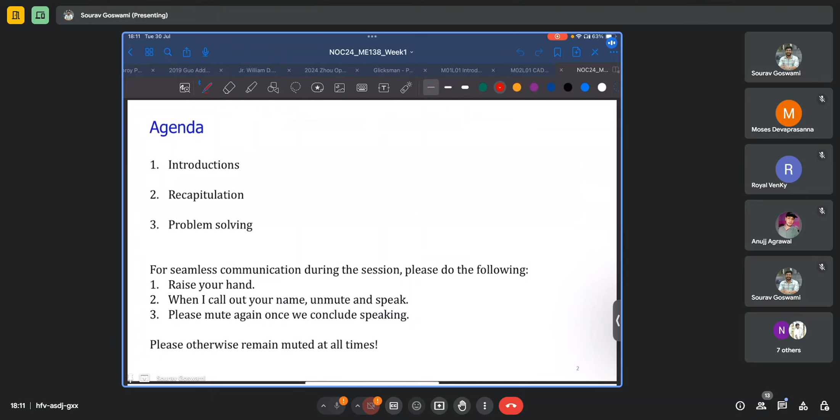Now, during the course of this session, I'll request that you remain muted, and in case you have a doubt, anyway, we'll be taking up doubts at the end. But still, in case you have a doubt midway, I request you to raise your hand, and then I'll ask you to unmute, and then we can discuss whatever your point is. And otherwise, please remain muted, as any undesired noises may disturb other participants.

So I just picked a few market trends from public sources on additive manufacturing. And for students or others like teachers associated with this field, additive manufacturing has become quite the buzzword. And there are courses, people and students are researching into it, papers are being published left, right, and center. But why the sudden push? Why the upsurge? And what is this buzz about additive manufacturing? And is it only restricted to our educational institutions and labs?

So here is a plot of the market size in billions of US dollars against a timeline. So currently we are somewhere here.

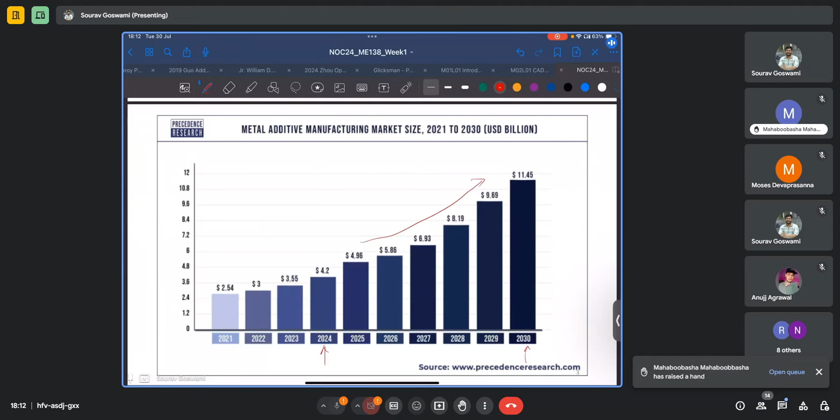2024, it's projected that the total market cap of additive manufacturing is somewhere around $4.2 billion, but it's a rising graph. And around 2030, it is expected to reach a market cap of 11.45 billion US dollars. So quite the opportunity for us.

And if we focus on Asia, we see that, I mean, of course, in the world, the US alone has captured or cornered 36% of the market. The next biggest leader is Asia with 28%. And among the Asian countries, China with close to 50% and Japan with close to 30% are the market leaders when it comes to, say, the money that they're pouring into R&D and technological development as far as additive manufacturing is concerned.

Mahaboobasha, do you have a question? Could you please unmute? Mahaboobasha, do you have a question? Okay, maybe not. In case you have a question, please raise your hand again.

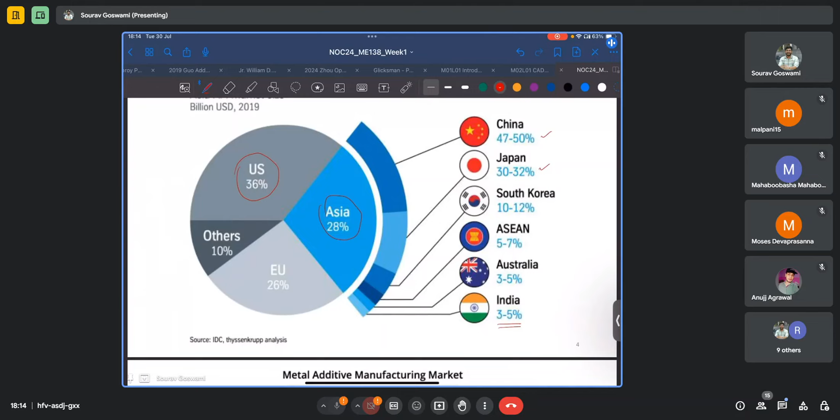It is the first word to come out of your mouth. Even if you ask me, so what is the application of your research? I'll blindly say aerospace. But how effective is that? Because for parts that go into rockets or that go into jet engines, there is a rigorous qualification cycle. And as we might already be aware, or for some others, as we'll come to know gradually, the parts that come out as built from the additive manufacturing process often do not have the most desirable properties. They might even have defects. They might not be as dense as they were designed to be. And thus, large-scale application of additively manufactured parts in the aerospace industry is a process in the making, but we are not fully there yet.

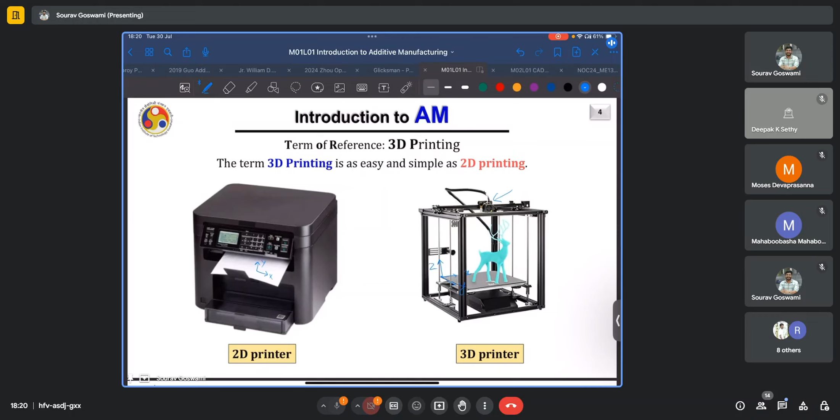Now this Z axis may be attached either to the build plate, in which case the deposition head moves in the X and Y directions, and the build plate changes its height with every layer, or the Z-axis may again be given to the deposition head itself, whereas the XY axis lies with the stage. So in each plane, the XY axis will move, whereas for each deposition, the head will keep rising by a fixed distance.

Now here is the formal definition of the additive manufacturing process. So AM refers to the layer by layer fabrication of three-dimensional physical models directly from a computer-aided design. It is an automatic process of manufacturing objects such as parts, prototypes, tools, even whole assemblies directly from their CAD models without the use of any cutters, tools, or fixtures which might be specific to the object geometry. Now, the definition is important because it helps us distinguish between processes and characterize whether they fall into the additive fold or not.

So typically in a conventional manufacturing paradigm, you would need fixtures and tools that are specific to the type of job that you're trying to manufacture. Say if you are working with a cylindrical job on a lathe, a three-jaw chuck is suitable. Whereas if your job suddenly becomes cubical or cuboidal, you cannot use a three-jaw chuck anymore. It must be a four-jaw chuck. Similarly, depending on the type of operation that you're performing, whether it is milling or cutting or drilling, the type of tool that you're using will change. However, additive manufacturing is free from such restrictions, and it is truly a free form fabrication because the same setup, the same machine, the same deposition head will work irrespective of the geometry of the object, however complex it might be, and irrespective of the final part that you envision in your mind.

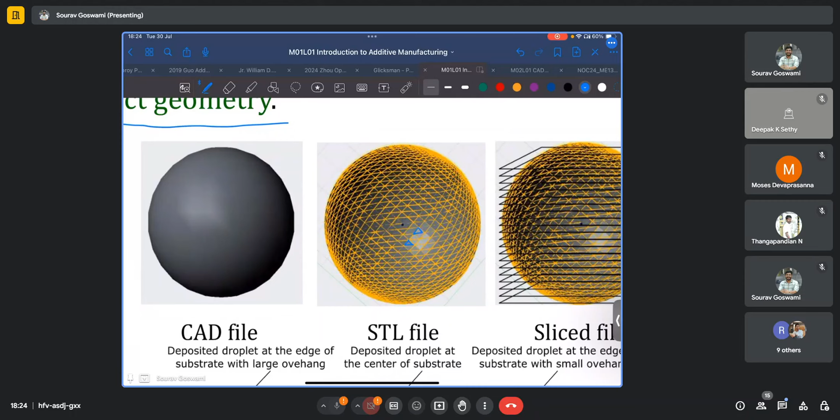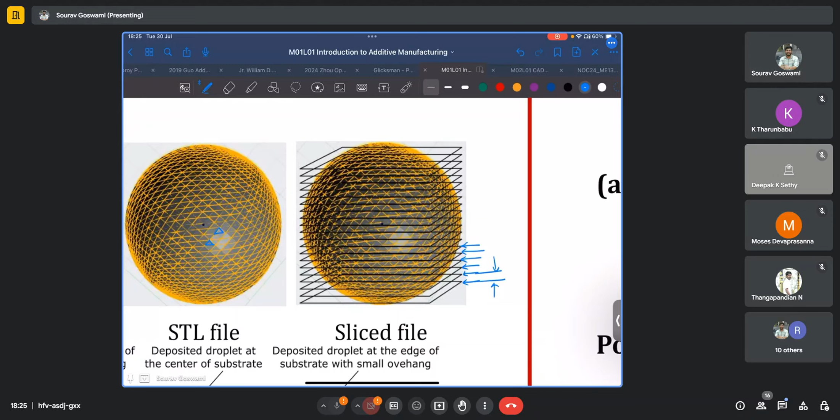Then we slice the tessellated STL file. Slicing because, as we read in the definition and as we have been discussing, the additive process is a layer by layer process and proceeds in a layer by layer fashion. So as you see in the example here, the entire sphere was first tessellated or covered in these triangles, and then this tessellated file is sliced by all of these planes, as you can see. And what will happen is, in each printing pass, the intersection of this tessellated file with the plane will be printed or deposited or sintered, depending on the process that we are undertaking. Then the deposition head will move up or the stage will move down by this fixed height of each layer, and then the next intersection of the slicing plane with the tessellated file will be deposited.

But of course, first, this slicing, tessellation, and generation of supports is being simulated in a computer. You're visualizing if there are any changes to be made, how the tolerances should be tuned to best achieve your end goal. And once we are satisfied with this pre-processing, once our work on the computer is done, we move on to the actual building of the part in our machine, which is in an additive fashion, or a layer by layer fashion, which is accomplished through the stacking of successive layers.

And then in most cases, you would require a post-processing step where, if you have generated supports, you might need to break them away or in certain cases dissolve them in certain chemicals. You might need to finish the surface of your finished part because the surface tolerance and the surface finish might not be at your desired level. Or in certain cases, if the density that your as-printed part has does not qualify for the client's requirements, you might even have to undergo a step such as hot isostatic pressing to improve the density.

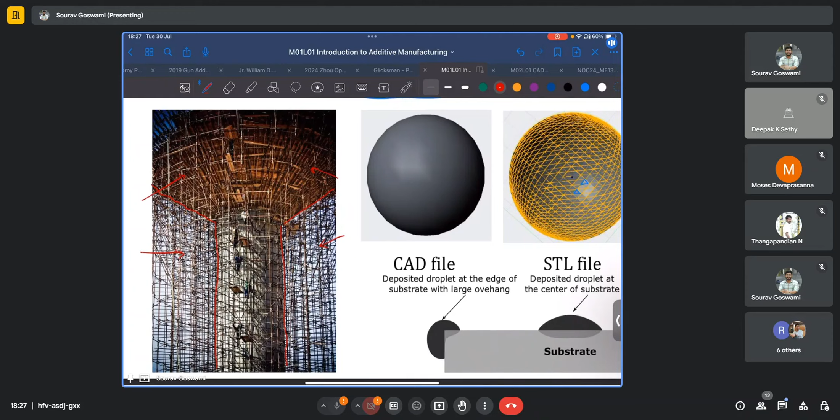Now, we see these structures all around us all the time. But at the time of their construction, they must be supported by, for example, the bamboo scaffolding that we see here. Once the concrete has solidified and hardened sufficiently, the support structures may be removed. And similar is the case for additive manufacturing. That is, for geometries which might have significant overhangs, we might need to support them with additional support structures which are not really part of the original intended design, and thus they will have to be removed.

And since we have to remove them later, of course, an intelligent guess would be to make them, say, not as strong as the core part, or to make them thinner, or less dense, or even hollow, so that the removal is easier. However, they must still be strong enough to support the product.

Here again, the instances of deposition of material on a flat substrate are illustrated. So when a material is being deposited, say in the bulk or in the middle of the substrate, there are no problems because it is supported on all sides. However, when we are depositing near a corner, the dynamics will be such that there is the weight of the droplet or the material acting, then there is the surface tension acting on the surface of the molten material. Also, there is a normal reaction. There will be frictional forces and so on. And the interplay of all of these forces, or their balance, will decide whether this material is able to rest on the substrate or it falls off.

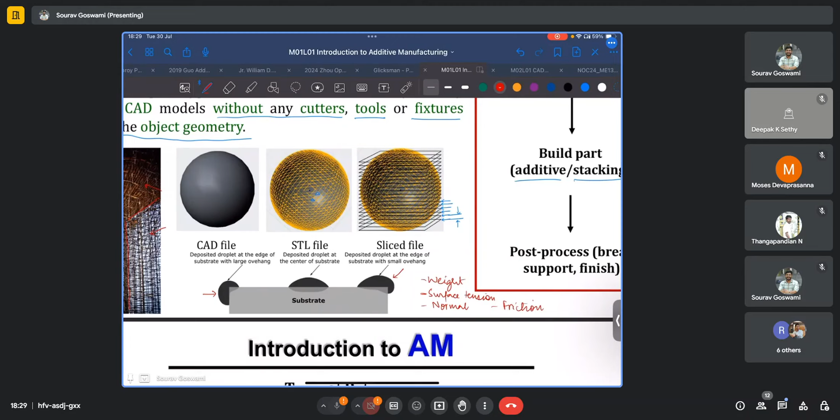In the example here, we see that if the overhang is large, or in simple terms, if a larger portion of the droplet is without a support, there's a very good chance that it might simply fall off. And one can also imagine that even if, say, for the first layer, the material was able to be sustainably put on the substrate, with consecutive layers of build-up over this overhanging part, there might come a critical point where the pre-deposited layer is unable to support the load anymore and the structure collapses.

We'll be touching all of these aspects in great detail as we move through this course.

Some greater insight into the term digital manufacturing. Now, digital manufacturing is actually used to refer to the set of technologies which can reduce the product development time and cost, as well as are capable of addressing the need for customization, increased product quality, and faster response to the market. Let us discuss each of these terms one by one.

So, how does additive manufacturing help to reduce the product development time? We will come across a flowchart of product development where we will see that the typical or conventional cycle actually involves multiple iterations of designing, refining the design, making a prototype. There are lead times involved everywhere. Then corrections are to be made, toolings are to be designed, the assembly line, the production line has to be customized to each product. And after a few iterations, we end up with a final version of the product, which can then go into mass production. However, with AM, most of these complexities are alleviated.

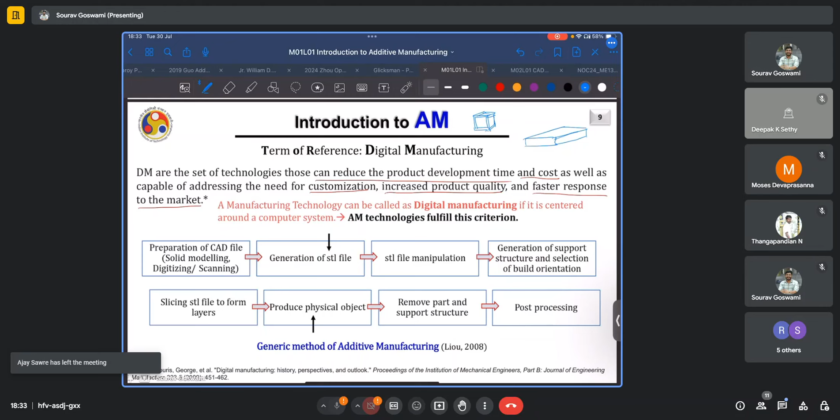Customization, as we discussed, we can make the design to suit a specific patient in the case of implants. You don't need to adapt your production line as per the needs of each patient. Increased product quality, well, debatable, given that most times the product coming out of an AM cycle still need further post-processing and need to be qualified rigorously. Faster response to the market because of the immense flexibility and adaptability, as we'll see.

And a manufacturing technology can be called digital if it is centered around a computer system. And as we saw, our very production starts in front of a computer, and we'll spend a good amount of time optimizing the production in the computer. Thus, AM technology fulfills this criterion. And just like a digital image is made out of two-dimensional elements called pixels, the same analogy somewhat is extended to the case of STLs or standard tessellation language files or stereolithography files, as we'll see.

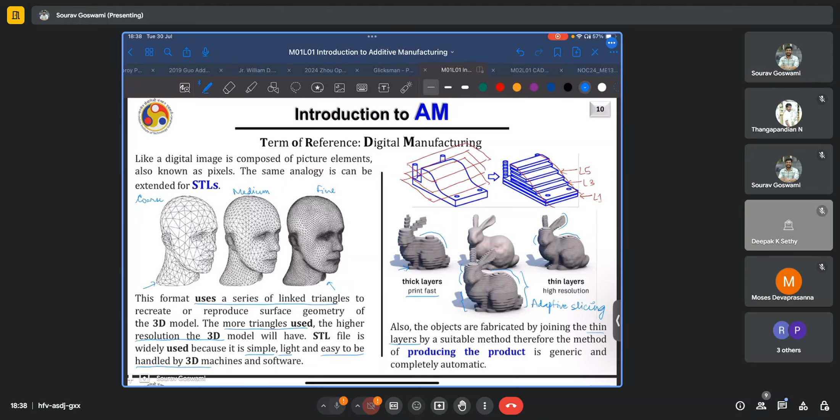The objects that are fabricated by joining these thin layers by a suitable method of our choice is a generic process, and it is completely automatic. It is not dependent on the geometric complexity of the material, the difficulty in machining the material, or for the need to design special fixtures and special tools.

Now here we have an example that illustrates rapid prototyping versus virtual prototyping. And based on this, I would say excellent classification on whether a prototype is physical or virtual, or whether it is a component level part, or it is a complete assembly, and how accurate or rough the representation is, we can end up with different stages of development.

So if it is a physical part, but only of a component level, and it is rough, we can end up with a foam model of a car. If it is physical, it is very accurate and complete, it is the final product itself, as one would say. If it is just a virtual representation and a rough representation, that too, a sketch suffices. And if it is complete but virtual, it's the CAD model of a car.

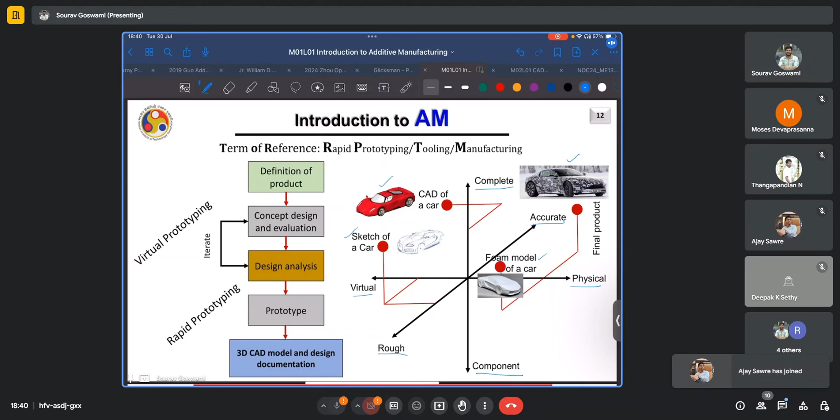Here we have a flow diagram illustrating the relationship between virtual prototyping and rapid prototyping, and Professor Kapil explained it pretty well. Let us also familiarize ourselves with the capabilities of the AM process, and in the duration of this course, also the limitations of the process. So AM refers to layer by layer fabrication of three-dimensional physical models as we study, and the primary capabilities that we'll be looking into are the geometric capabilities and the material capabilities.

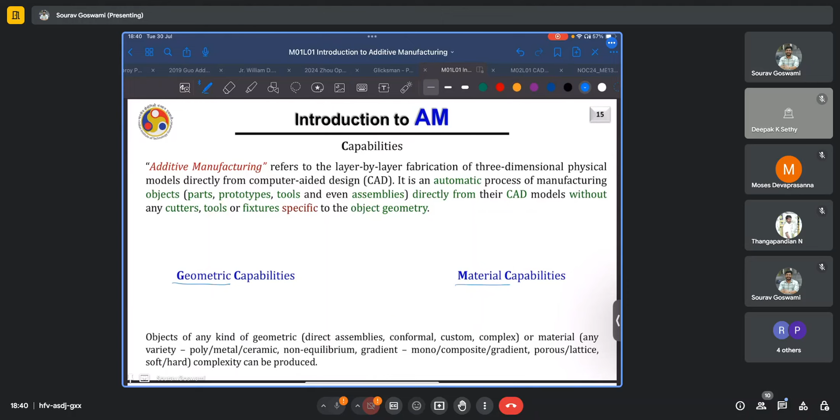Why is this similar to the conventional design and not exactly the same? It is because of something called design for additive manufacturing, whereby we adapt our design to have the same functionality, because that is paramount. We can't really change the functionality. So say it should have the same strength, it should have the same number of degrees of freedom, and so on. But we slightly tweak the design to exploit the benefits of additive manufacturing and to overcome any limitations.

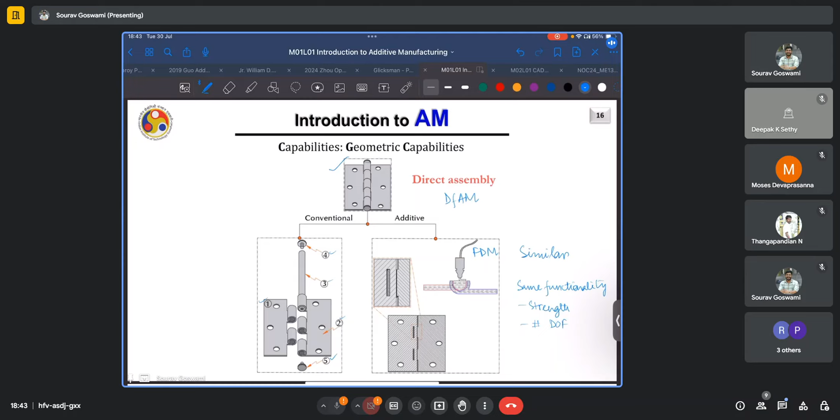Say if you have large overhangs, you would like to minimize them. Thus, the same part can be produced additively and via conventional routes, and each will have its own features. In the duration of this course, as we cover each process step by step, we'll find out what the specific limitations are in each case.

Again, in terms of geometric capabilities, another example which illustrates the high value of the additive process is the manufacturing of these conformal cooling channels when you are, say, casting a part. So typically, you will have these parallel cooling channels along the ends of the mold, and you will have water or any other coolant of choice circulating.

Say it goes in one way, comes out the other, but it's not really suited to the type of part that you're trying to manufacture. Whereas in an AM process, you can actually have these conformal cooling channels printed around your part itself, to suit the specific geometry or the customization that you're looking to manufacture.

For example, in this case here, we are trying to print this mold, and what we can do is we slice this geometry. So if I slice something like this along this plane, maybe I'll not deposit material in the center, wherever my cooling channel is supposed to be. And for the rest of the part, I will have material deposited. The dimensions of this region with no deposition will vary with the change in cross-section of the part.

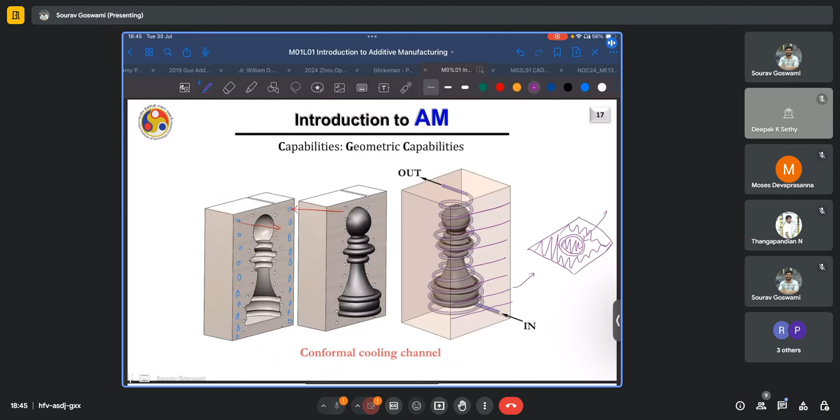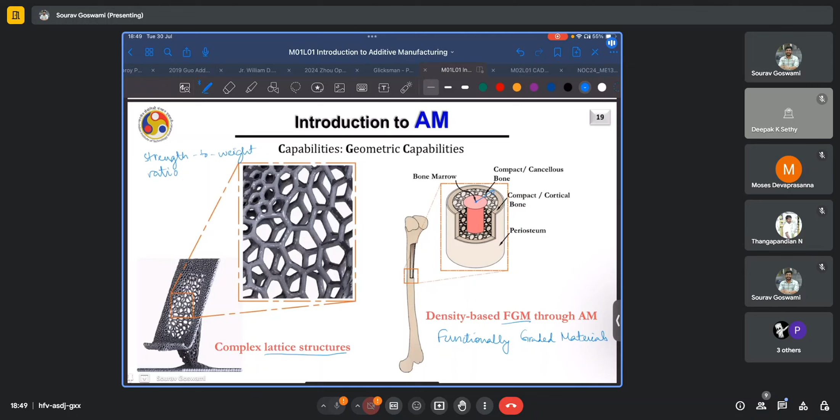Some of the materials that can be processed by additive manufacturing are listed here. I'll not go through the entire list, but as you can see, a wide gamut of materials is covered: polymers, ceramics, food materials, pure metals, alloys, high entropy alloys, and so on. Functionally graded materials, as we discussed.

Now, coatings have been previously used to suit such an application, but say you have this metal part and you coat it with a ceramic layer, but then this coating is a tricky process. It is costly. Not all coatings are compatible with all surfaces. Your surface might even require some, say, pre-processing. The coating being very thin is vulnerable to damage. It can be scratched off, and then it can come off as well.

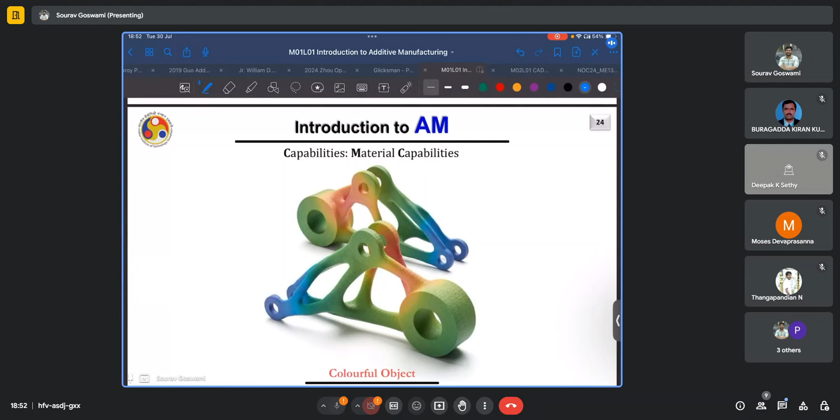Another example of changing material being this colorful object, where depending on the location, the authors have used different colors to build a part. These colors are not just on the surface but through and through because the material or the filament used to build them were different. Some other examples, a transparent object and another colorful object.

And finally, the classification of the additive processes into various categories. So as per ASTM, there are 7 major types of additive manufacturing processes, and all additive processes may be classified into any of these 7 types. The first is vat photopolymerization, where you have this vat of a resin or similar material full of it, and your stage moves down in each step. We use a UV laser, say typically of some 40 to 50 milliwatts. The laser scans on the surface of the resin and cures the area of interest.

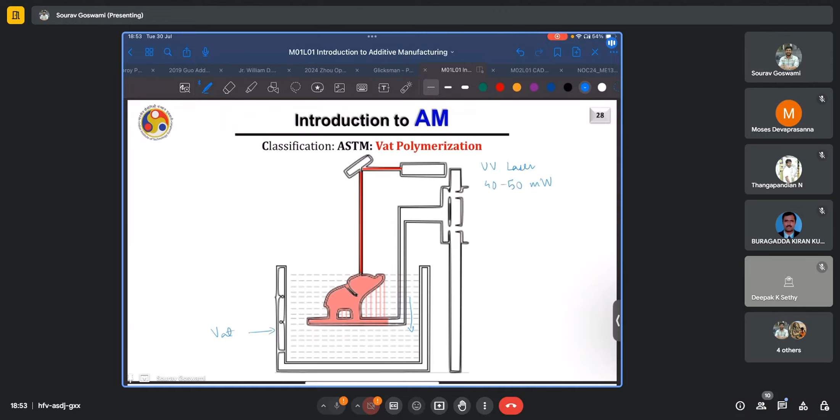Then the stage moves down by a pre-decided layer height, and the process is repeated until we end up with the fully built part. Now notice here that the laser assembly is on top, and so the stage is moving down, but it might also be the case that in some cases the laser is coming from the bottom and the stage is moving up. We'll examine what the advantages and disadvantages of either configuration is later in the course.

The next case is binder jetting. So previously we were dispensing the building material itself. Now we are just dispensing the binder material. Binder is something which holds your building material together. So in this case, say the vat or the tub is already full of the building material, and you are just selectively dispensing the binder layer by layer as the stage moves down, and only those regions are hardening up to form the part.

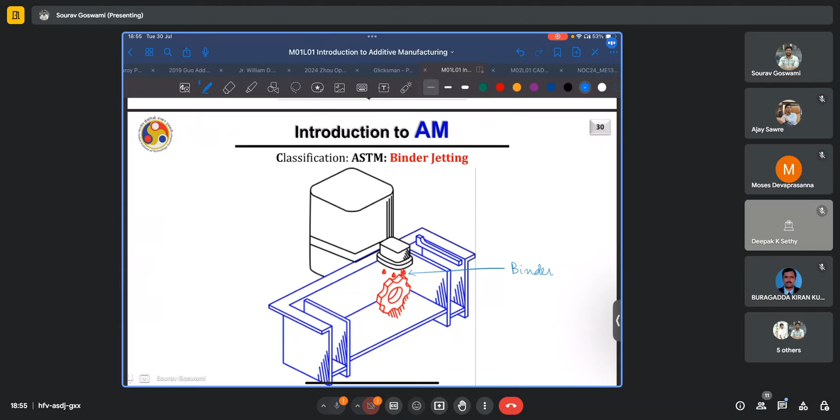Professor Kapil cited the example of cement and water, how cement is the construction material and water can act as the binder. So if in a layer of cement, you selectively dispense water in selected regions, only those regions will harden up. And if you perform this accurately, layer by layer over many layers, you can end up printing a three-dimensional part.

The next class of processes are the material extrusion type processes, such as fused deposition modeling, FDM. In this case, you extrude these wires using at least a pair of rollers, sometimes even more. These rollers help you control the extrusion rate, or the rate at which you want to supply the material. You have a resistance heating zone where you use resistance heating or joule heating to reach temperatures of the order of 200 to 300 degrees Celsius, sufficient to melt or at least bring into a semi-molten state the mostly polymeric materials used in this case.

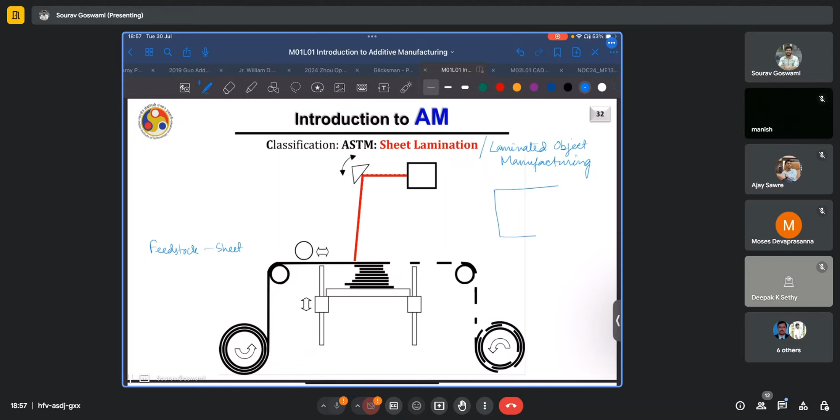Say you're trying to print some simple geometry like a star. Your laser will scan over this region and cut out this star from the sheet. Then, using some mechanism such as a thermally activated glue or ultrasonic means, as we will see, this layer of the part will be fused to the previously built layers, and then the remaining sheet will be rolled out. As you can clearly see, it is not a purely additive process because there is this subtractive step or machining step involved.

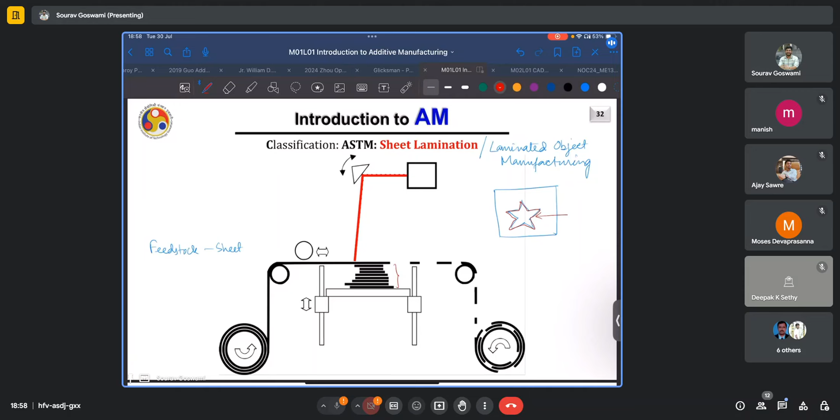Thus, all laminated object manufacturing or sheet lamination processes are by default hybrid type of processes. And there are two paradigms in this case, form then bond, bond then form. We'll talk about it when we come to it.

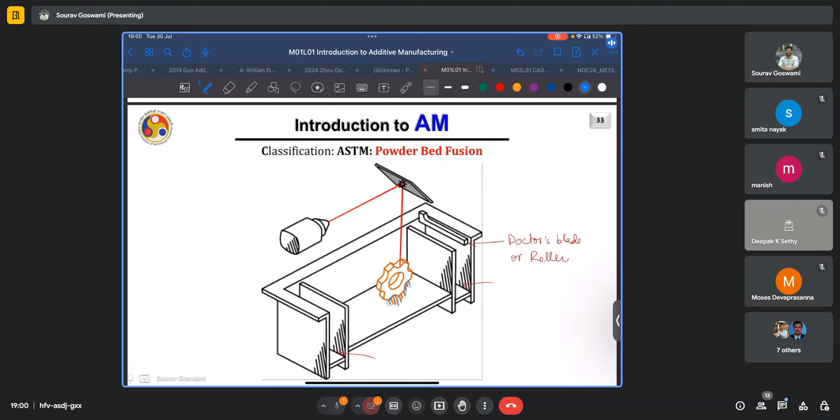However, as we discussed, the dimensional accuracy or the surface finish might not be as good. And so depending on your budget, depending on your application, depending on the desired quality of the product, you will have to choose whether you want to opt for a conventional or an additive process, and if an additive process, which one of those.

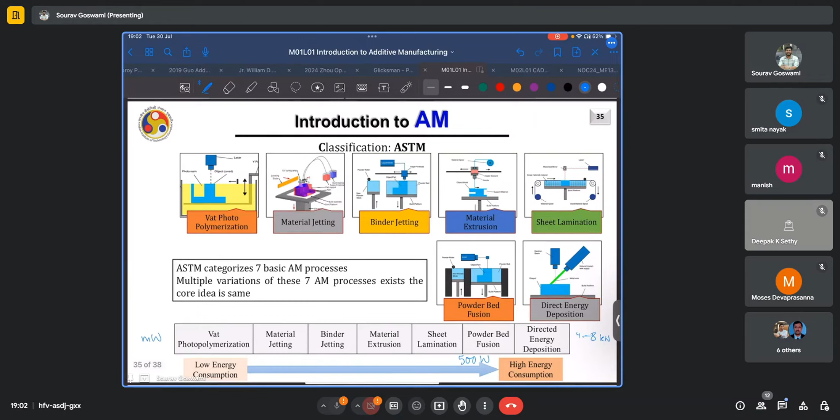However, for this course, as Professor Kapil pointed out, we'll be following a classification that is based on raw materials. So based on the type of raw stock, whether it is liquid, solid, or gas, we classify the processes and study them. And for gases, there is no, say, explicitly designed or explicitly explored additive process as of yet. There are some that come close.

So I have read a few papers where they propose to perform nano additive manufacturing using aerosols. So aerosols are not technically gases. It consists of particles that are dispersed in a gaseous medium, but it is getting there. And you use these aerosols to form highly controlled nanostructures with myriad applications. So let us quickly move on to the second one, and then we can get to solving questions.

In the second lecture of this week, we were introduced to the concept of solid modeling. Of course, most of us would have done a few courses on solid modeling, even be familiar with a few CAD softwares such as AutoCAD, SolidWorks, or CATIA, or so. Still, for the sake of completion, solid models are known to be complete, valid, and unambiguous representations. And a complete solid is one which enables a point in space to be classified relative to the object, whether it is inside, outside, or on the object. A valid solid should not have any dangling edges or faces, and an unambiguous solid has one and only one interpretation. It is not subjective.

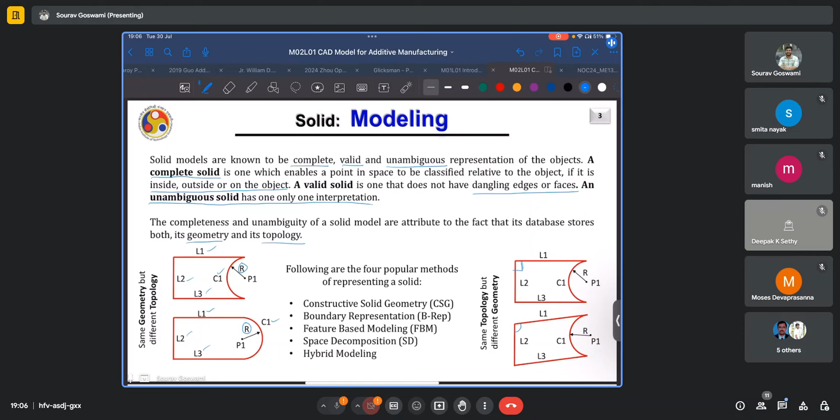And some of the popular methods of representing solids are constructive solid geometry or CSG, where you have these basic solid objects called primitives, such as cubes, cuboids by extension, cylinders, cones, and you perform Boolean operations using a combination of these primitives to come up with the final part of choice. Second is boundary representation or BREP, where you represent any solid in terms of the surfaces.

Third is feature-based modeling, where you use features such as sweep or extrude and other similar operations to come up with the solid geometry of your choice. A very popular software, SolidWorks, uses feature-based modeling. Then there is something called space decomposition. And of course, if you're using a combination of any two or more, what you're performing is actually hybrid modeling. Now, Professor Kapil has already talked about all of these, so I'll be skipping over these for now.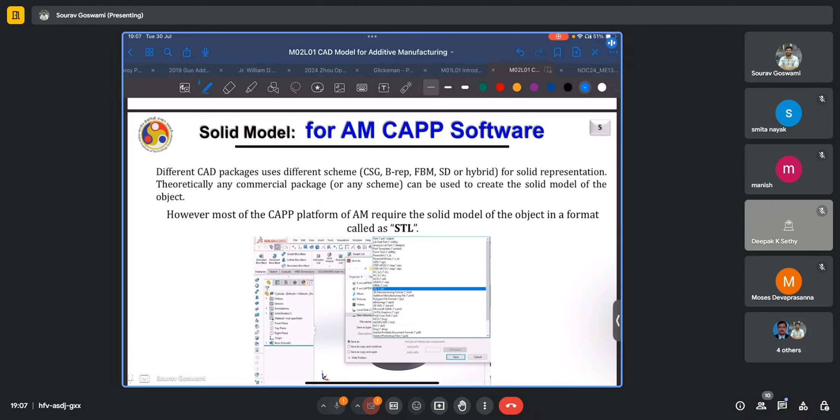And as we discussed in the previous lecture, for most of our additive software and additive applications, we'll be requiring the CAD file to be in something called an STL format. The STL format, in fact, derives its name from the term stereolithography, which was the very first additive manufacturing process which was commercialized. Over a period of time, it has been expanded to be more general to the additive process and has been expanded as standard triangle language because we use triangles for tessellating our surfaces, and also as standard tessellation language because of the tessellation process.

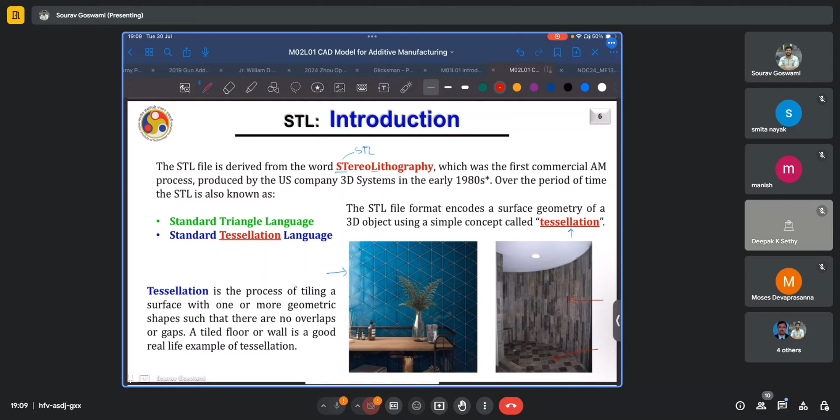The STL file format encodes the surface geometry of a 3D object using the concept of tessellation. Here we see examples of tessellation where we have covered surfaces such as the walls of our house using these triangles. In some of our houses, the floors may be covered by such square tiles. This is also an example of tessellation. This curved wall is again covered by rectangles, which is again an example of tessellation. Tessellation simply refers to covering a surface such that there are no overlaps and no gaps.

STL is a faceted boundary representation model which approximates the model surface by a series of connected triangles. It does not contain any information related to the color, the texture, density, or even the material. It only has the surface information. The STL file describes the raw unstructured triangulated surface by representing each triangle in terms of its unit normal and by defining its 3 points.

And of course, for any surface we can have two normals. One is the outward normal, one is the inward normal. In the case of the STL file format, we define the outward normal, and its definition is that along the direction of the normal, there is no material present. So, say behind this normal, there is matter.

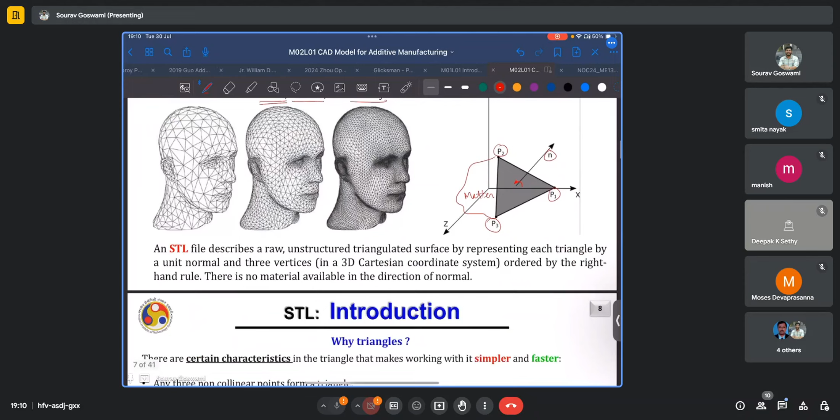The question, of course, then arises: why triangles? What makes them so special? Any three non-collinear points form a triangle, and to define a plane, you need only 3 points. We are well aware of that. Every triangle forms a unique plane, and triangle points cannot be part of two planes. Thus, there is no ambiguity and no problem of dealing with multiple solutions or other computational errors. Any surface or any geometry can be broken down into triangles, and triangles can only be further broken down into other triangles. The triangle is the most versatile and the most universally flexible shape.

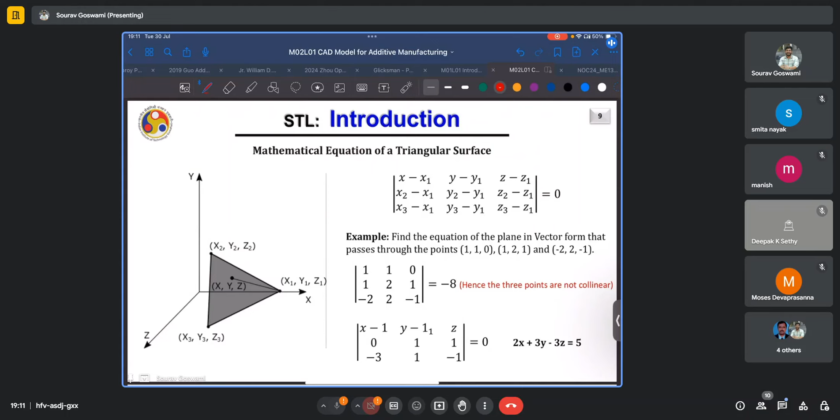The occasion might arise where we have to compute the mathematical equation of the triangular surface, or in simple terms, the plane that a tessellated triangle is approximating. And here is the equation for that. We'll also be touching on an example during our problem solving time.

The STL file basically contains a set of oriented triangles. As we discussed, it has information about the unit normal, in terms of its components nx, ny, and nz for each triangle, and the points. For each point, you have the x, y, and z coordinates. The file lacks any topological information like links, pointers, or other. It only contains the geometrical information. And each vertex is written by its coordinates as many times as it occurs in the mesh.

This may lead to problems as mentioned here, because in computations there are round-off errors, and these errors may compound over time based on repeated or iterative recalling of these points. And often there might also be truncation errors where we are not using the same levels of precision in calling these vertices every time. Over time, these errors add up and cascade quickly into computational errors. Also, STL does not contain the dimension units. What you have is a parametric representation and it is easily scalable. On the downside, you don't really know what dimensions you're working with.

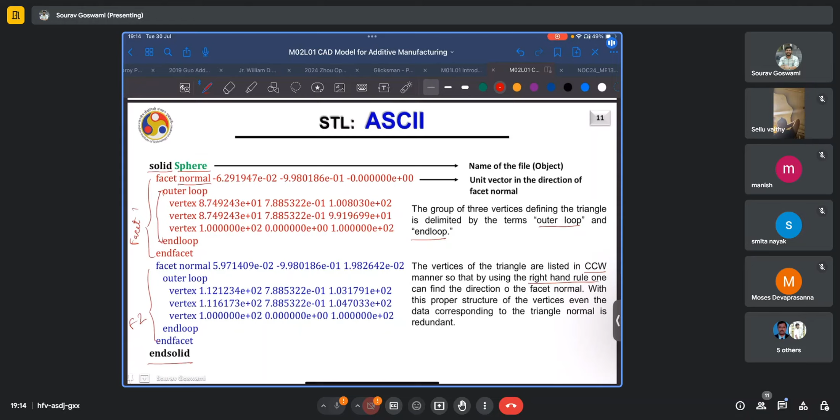And if you're already listing the vertices in a counterclockwise fashion, as you can pretty much figure out, even the information regarding the facet normal is somewhat redundant. We will look at an example where we must calculate the unit normal of a triangular facet later. And it has also been shown via some simple calculations that the information about the facet normal is indeed redundant and it can be calculated from the information about the vertices.

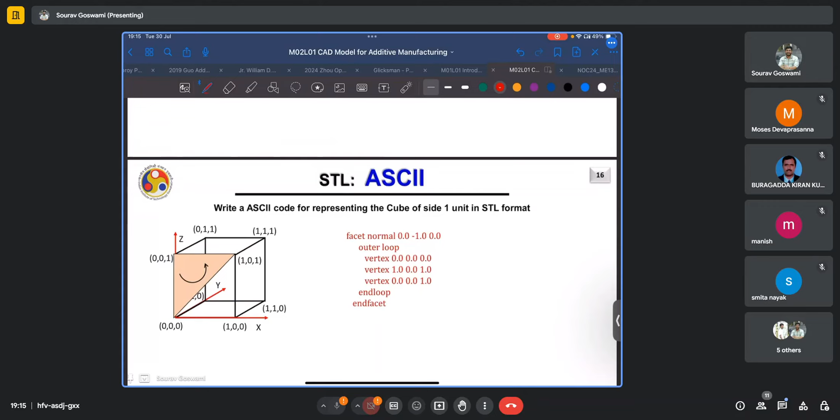Professor Kapil also illustrated how to write an STL file for this unit cube that we have here. I'll not be covering it again. And he shows how, since you have six square faces, you divide them into 12 triangles, and how you write a facet loop for each of these 12 facet triangles, and how you end up with a final STL file.

In each case, we should be careful to list the vertices in a counterclockwise fashion. The exact sequence does not matter. Say, if I name these points A, B, and C, it is not always the case that I must list them only as ABC. BCA or CAB are equally correct because they all have the same sense, same counterclockwise sense.

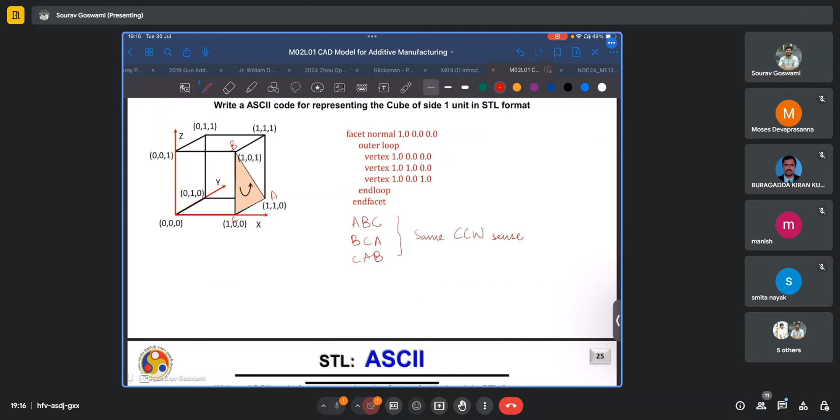The other format for storing STL files is the binary format, which is more machine friendly and it has the following characteristics. So an 80 byte ASCII header file, which is used to describe or name the part, the 4 byte long integer for indicating the total number of triangles, and each facet will have 50 bytes allocated to it, 3 floating of 4 bytes each for the normal vector components. Now 3 floating values of 4 bytes each for the first, second, and third vertex, and one unsigned integer of 2 bytes, which should be 0, which is used as a check to see whether the file is proper or whether it needs repairs.

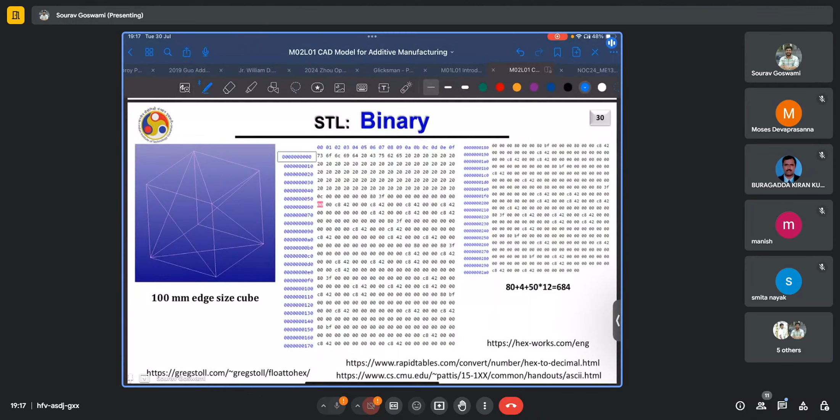And here is an example of such a binary STL file. Professor Kapil also walked us through this and showed how and what each line of the code means. I'll not be doing that again. And as we previously discussed, depending on the size and number of triangles that we are using to approximate a surface, the mesh we end up is either a coarse mesh or a fine mesh. There is always a trade-off between the accurate representation and the number of triangles used. The larger the number of triangles, the larger the file size.

Some of the parameters which are used to quantify this accuracy are deviation tolerance and angular tolerance. So deviation tolerance is measured in terms of the chord height. It is the maximum deviation between the designed part and its STL representation. And the chord height is basically the perpendicular distance or the maximum perpendicular distance between the actual curve, which is given in green in this case, and its STL representation. Of course, as we see, this error varies along the curve, but we are looking at the maximum perpendicular distance.

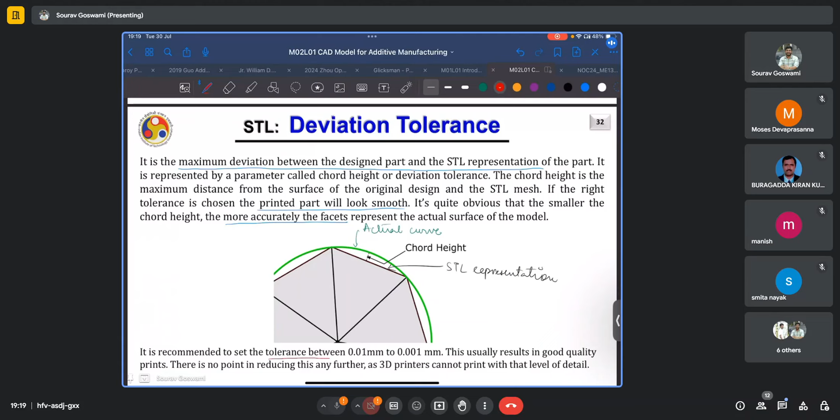And if we choose the right or the optimum tolerance, the printed part will look very smooth. It will have a good finish. The smaller the chord height, the more accurate the representation. And as a rule of thumb, it is recommended to set the chord height or the deviation tolerance between 0.01 to 0.001 mm. This results in good quality prints.

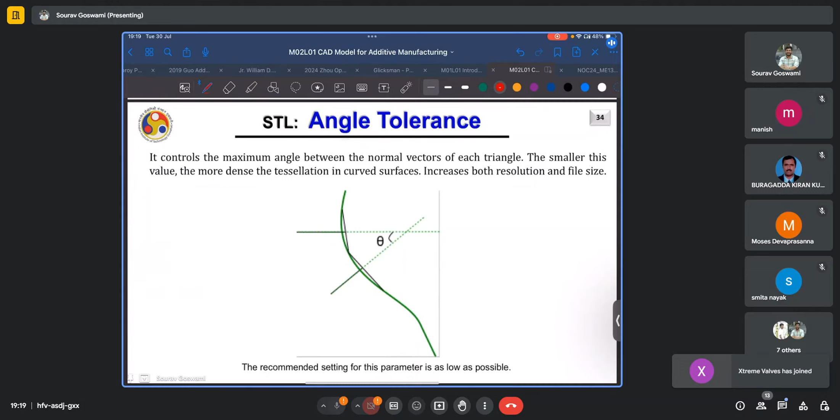If we were to think that we can keep on decreasing the deviation tolerance monotonously and end up with better and better parts, there is no point in reducing this further because in most cases our 3D printers will not have the resolution to print at finer details. We'll be looking at examples on deviation tolerance during our exercise. Again, the angle tolerance controls the maximum angle between the normal vectors of each triangle. And in this case, we can have a monotonously low value. So the smaller this value, the better.

Now, the computation of the line of intersection of two intersecting surfaces can lead to errors in knot-to-knot connection, the vertex shared by the triangles lying on different surfaces. And as we discussed, given that we are representing each of these triangle vertices by float values, depending on each iteration, the truncation errors and round-off errors may lead to cases where there are gaps between these triangles. The same vertex is called differently for each triangle, and they do not really meet at a point.

Often due to a higher tessellating resolution, smaller triangles are generated and the triangles may collapse into a line. So if we are trying to break down a surface, say we have a triangle, we are trying to break it down to obtain a finer and finer mesh. This is a case where we break it down into two. But if we start to have our tessellating triangles finer and finer, you can well visualize that there will come a time when the aspect ratios become very large and the two vertices of our triangle coincide and the edge simply disintegrates or degenerates. Thus, we can't have an arbitrarily fine mesh.

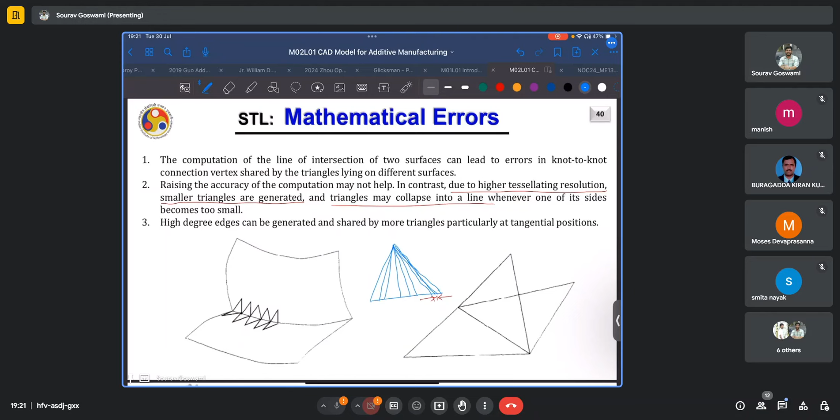Also, high degree edges can be generated and shared by multiple triangles and at tangential positions. So some of the errors to look out for. We are done recapitulating. So why don't we take a short break of say 5 minutes and then we'll start with our problem solving session. So I'll see you all in five.

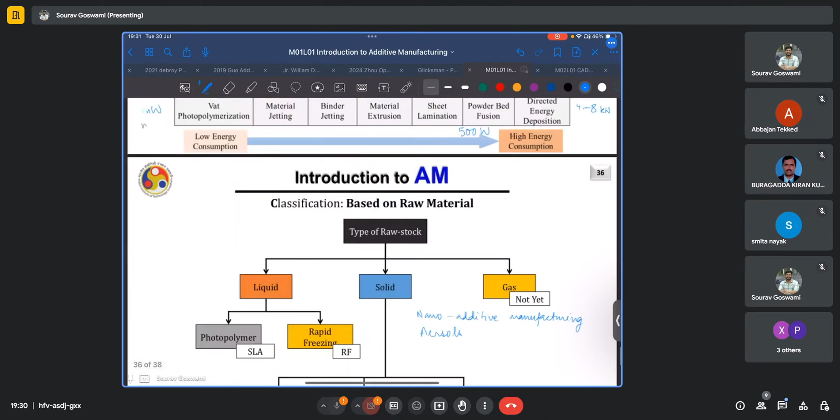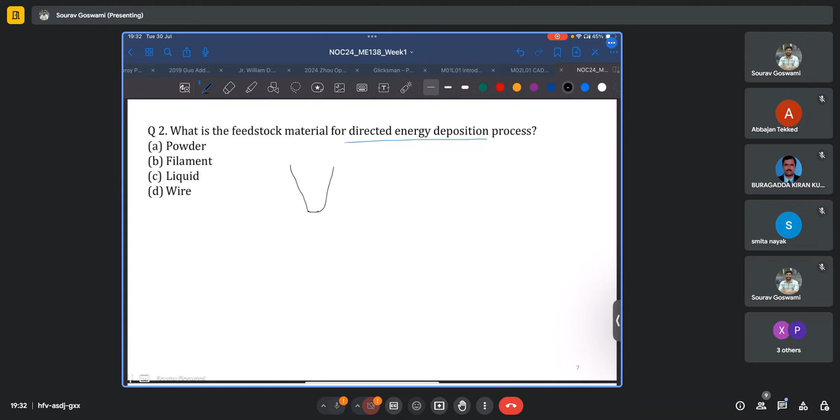The second question is related to one of the AM processes that fall into the broad classification that ASTM has laid out, specifically the directed energy deposition or the DED process. And the question being asked is, what is the feedstock material for a directed energy deposition process? Is it powder? So typically, if we look at a deposition head, we see that in certain arrangements, we have the laser coming out of the center, and from the sides, we have these streams of powder. Of course, in this view, we can see two, but there may be four to six or even more, depending on the configuration that you have, and it will get deposited on a substrate. So powder is definitely true. I mean, powder DED is pretty commonplace.

Filament, not quite, because filaments are used more in the extrusion type processes, so more like FDM. Liquid, it will be difficult to transport liquid in a directed energy deposition process because typically we use a carrier gas for carrying powders. With liquid, it gets more complicated, so liquids are typically used in processes such as, say, VAT photopolymerization. What about wire? Is wire a feasible feedstock material for a directed energy deposition process?

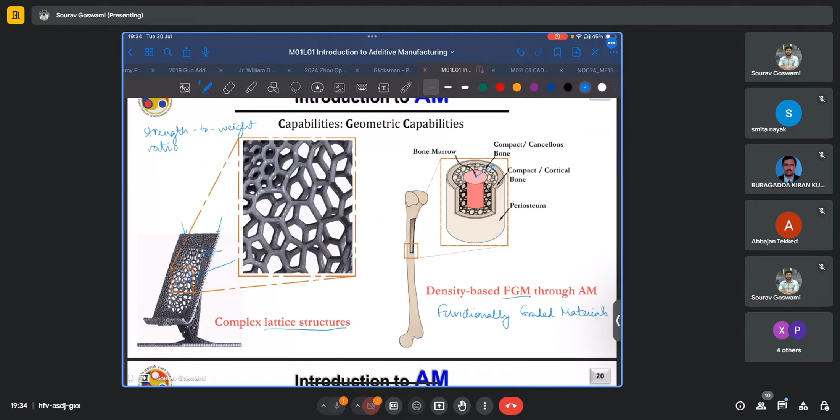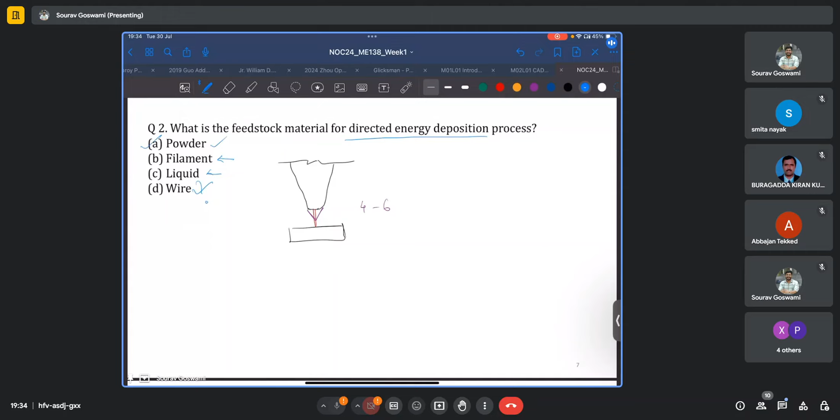An objective type question: what is the wavelength of the laser used in vat photopolymerization? And here we don't really have the exact values, but more like the range of wavelength. So whether it falls in the infrared range, whether it is in the visible range or the ultraviolet range. We know that for vat photopolymerization, our feedstock material or the raw material is in the form of resins or polymers. And the energy source which cures these resins is in the ultraviolet range. Thus, the correct option here is ultraviolet.

The next question is comparing additive and conventional manufacturing processes, and we are asked to reason which of these options may be true. So, the first option says that additive manufacturing can fully replace conventional manufacturing. Let us examine how valid this statement is. If I want a cranial implant for a patient who was in an accident, and I have a reconstruction of the patient's original skull, and I want to place an implant which is close in shape, size, and geometry to his original skull, will I opt for a conventional manufacturing process? Probably not. I'll go for an AM process because I already have the CAD reconstruction of the patient's skull, and with AM, I also have the capabilities to manufacture a part which will be very close in terms of geometrical approximation to the patient's skull.

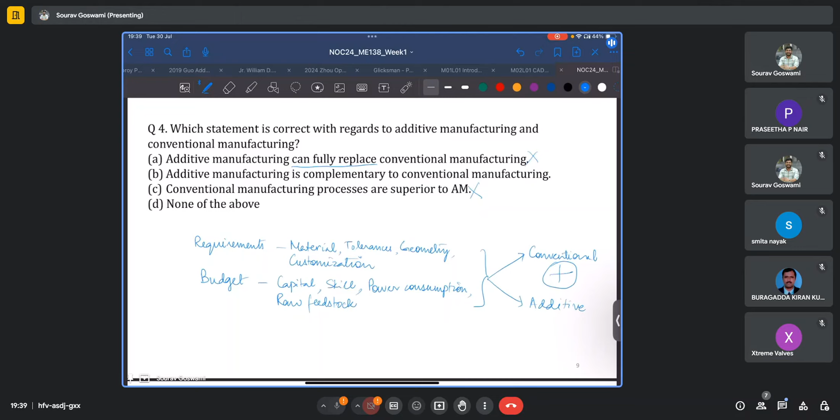Option B suggests that additive manufacturing might just be complementary to conventional manufacturing, and you can choose between both depending on your requirements in terms of the material that you're using. Is it difficult to machine? In terms of the tolerances that you want, in terms of the geometry that you're looking to recreate, in terms of the customization that you expect to encounter in the future with the similar production line, among others, and the budget that you have. And this budget may be drawn out by the capital investment on technology, the skill that you need, the power consumption, the cost of the raw feedstock. You take both of these factors into account, if not more, and then you make a choice whether you opt for a conventional process, whether you opt for an additive process, or whether you combine both of them. Thus, option B in this case is the correct option.

The next question is asking us which of the following processes may be classified as an AM process? And the processes laid out are DED, optical lithography, and investment casting. Now, DED, of course, I mean, we have just been talking about it. Clearly, it is an additive process. Yet, let us go by the definition and check. So, it is the process of joining materials to make parts from a 3D model data, usually layer upon layer, as opposed to subtractive and formative manufacturing methodologies.

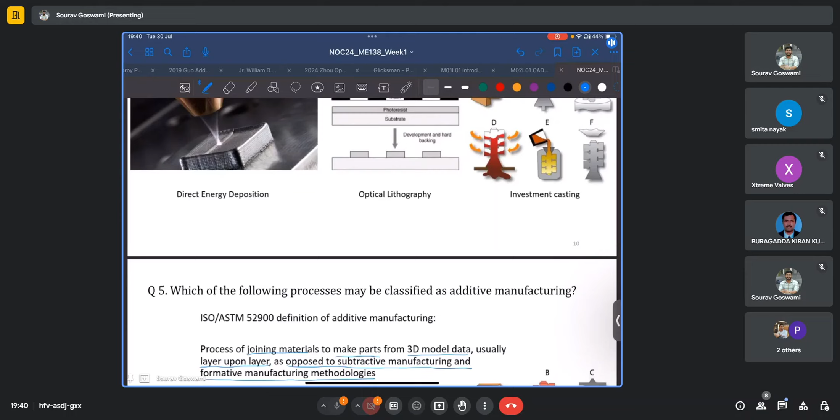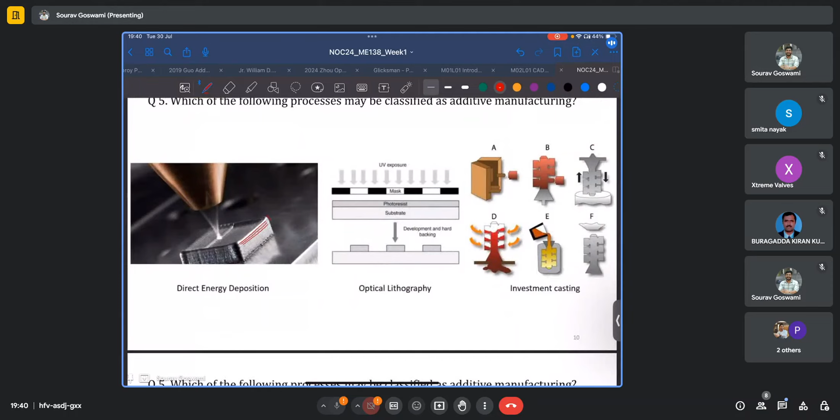In DED, we do join materials. We do start with a 3D CAD model. We perform this operation layer by layer, as you can see for this apparently a cube which is being printed here. So you see these multiple layers in each case, the boundaries of the layers. I'm just highlighting for your easy reference. So it is indeed an additive process. What about optical lithography? So we have something akin to a substrate.

We have a layer of photoresist. So the layer by layer thing is also coming into the picture. Then we expose it to some energy, in this case in the ultraviolet range, and we end up with this deposited or hardened material, which may be something similar to the sintered or melted material which we encountered in PBF. Say this is one layer.

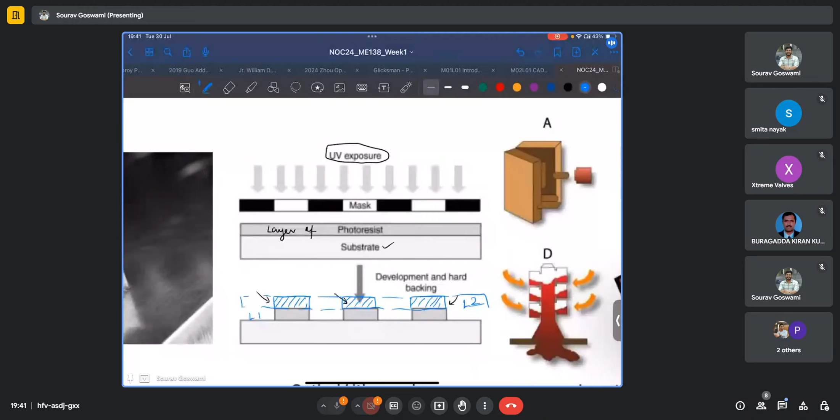For the next layer, I again place another layer of photoresist. If I want to build cubes, I expose this very region for the second layer, using my UV source and build up layer number two. This was layer number one. Similarly for the next layer, and so on and so forth. So is optical lithography an additive process? Would someone like to answer this?

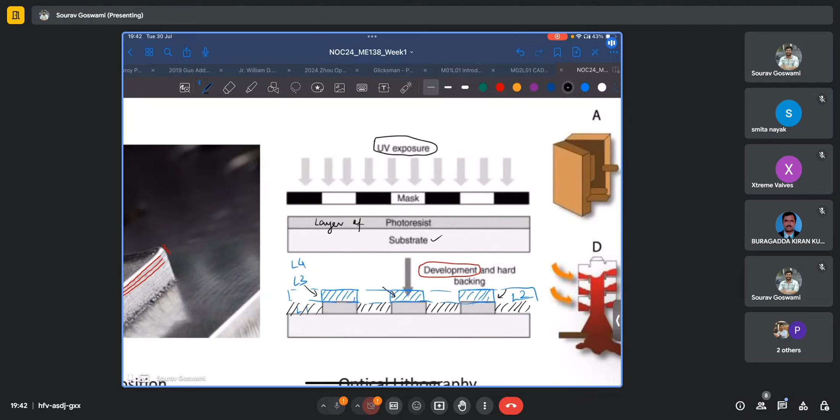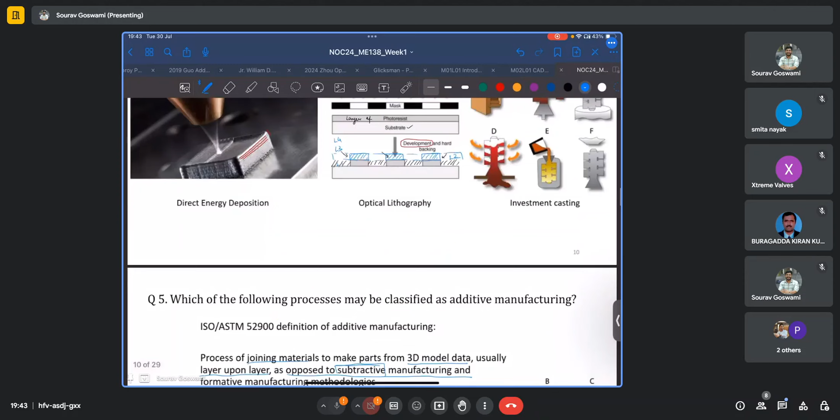One thing which I did not mention purposefully is what happens after this UV exposure. What is this development phase? Once the photoresist is exposed to a UV source using a mask, the remaining material, so the material which would have been here, is removed, and it is removed by chemical etching or chemical machining. Whereas the definition of additive manufacturing says it does not typically involve a subtractive or a formative step. Thus, in the true sense, it is not an additive manufacturing process.

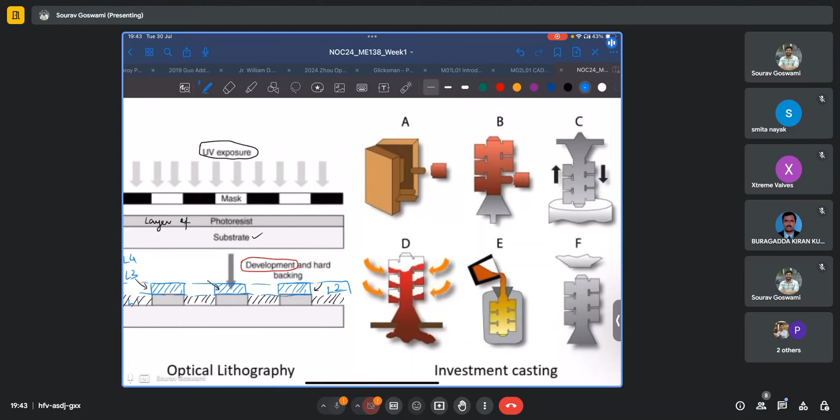The next question again is on strategies in additive manufacturing. What is a viable strategy to avoid support structures during additive manufacturing? Do we modify the design to correct overhangs? Well, typically your client gives you a rigid design. While some modifications must be made to adapt it to the additive process, if the design itself has overhangs in it, say for the water tank that we saw in one of the few slides, you cannot just eliminate it altogether, or you cannot end up building a column with the same cross-sectional area as the tank itself. That just does not work out.

Small modifications, wherever necessary, are permitted in the purview of the additive process, but we cannot per se modify the design to a great extent simply to correct the overhangs. So this is not a viable strategy. Is it possible? Yes. Is it feasible or viable? No. We utilize a preferential orientation to minimize or altogether avoid support structures.

Say in the case of something similar to the water tank that we had. Say if we are trying to print this funnel. If I place it like this in my geometric CAD model and print it, these regions will have overhangs. And what the software will end up suggesting to me is to have supports here. And the need for these supports is actually dictated by the angle of inclination. So say this is the vertical direction and this is the angle theta in this case. Now typically we will have some critical angle, say theta critical,

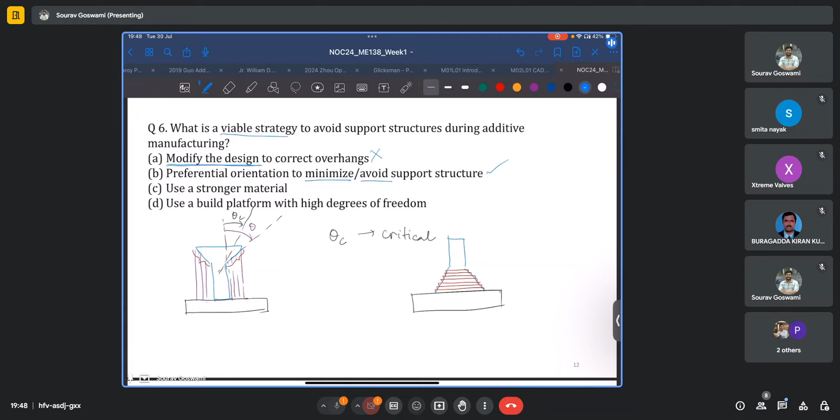the need for support structures, as we discussed, arises out of the geometry of the part. That is, whether the overhanging section is inclined at an angle that exceeds the critical angle for that material and that process or not. Whether you choose to make it out of a stronger material will not really influence the need for support structures. Say you were printing this funnel with polymer, and to avoid support structures, you decided to make it out of some super alloy, such as Inconel. You will still end up needing support structures. So this option is not true.

Do we use a build platform with high degrees of freedom? Say you have a part which is like a manifold, so something like this. And you are printing it on your substrate. Now, typically, if we were to just print this on a machine with only three degrees of freedom, so X, Y, and Z, typically we would be requiring support structures to support these overhanging regions.

But if we were to use a stage with more degrees of freedom, say 5 axes, such as a 5 axis CNC bed, what we can do is in each step we can tilt this manifold. Say if I am printing this plane at the time, I can tilt my bed such that the layer that I am printing is always perpendicular to gravity, and thus there is no need for support structures. So as I continue to build along different planes, I will keep modifying or tilting the position of my stage, and thus I will simply eliminate the need for any support structures. Thus option D is also correct, and in this case we have options B and D.

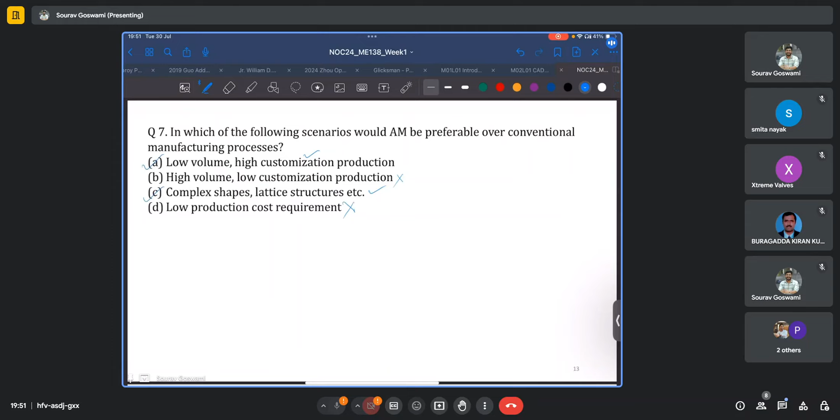In which of the following scenarios would AM be preferable over conventional manufacturing processes? In case of low volume and high customization, yes, customization is easier to achieve via an AM route compared to a conventional one. High volume, low customization production. If the customization is low and the build volumes are high, that is you want to manufacture a large number of parts, you would typically aim for a conventional process. For complex shapes and lattice structures, often AM is the only way to go. Low production cost requirement. Now, AM is typically not cheap, but if we talk about the capital investment in the machine, the energy sources, the power consumption, the skill that is required. AM typically is a high cost affair. So, for low production costs, it will not be suited. Thus, A and C are right options.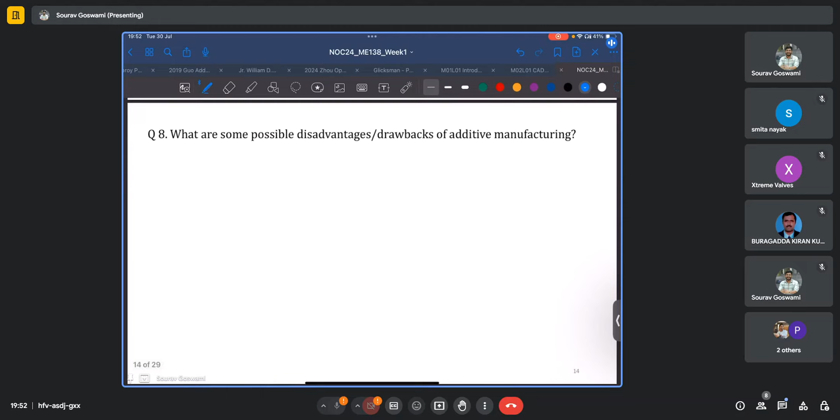Here we are asked to list out some of the possible disadvantages or drawbacks of the additive manufacturing process. I would trust that in the course of this session, I have given you enough insight to maybe come up with a few of them on your own. So I'll leave this as an exercise. Please think about it, and we'll maybe discuss in the next lecture, as to what some possible disadvantages or limitations of the AM process may be. Let us now move on to the subjective exercises.

The first being to find the equation of the plane in vector form that contains the following points: 1, 2, 0, 1, 4, 2, and minus 4, 2, minus 2. Now, similar examples were also covered in the class, so we are well aware that in such cases, the first step is to check for collinearity. That is, whether these 3 points lie on the same line or not. If they do, then there are infinitely many solutions for the equation of the plane that may satisfy these 3 points. And the way to check for collinearity is, of course, to check for the determinant of these 3 points. If the determinant is 0, the points are collinear.

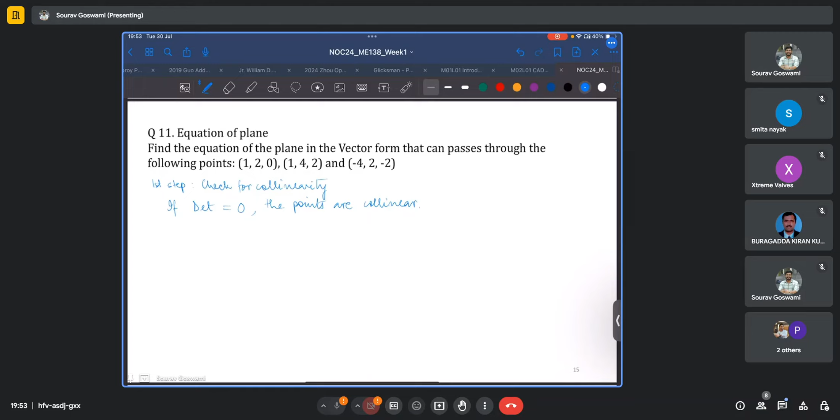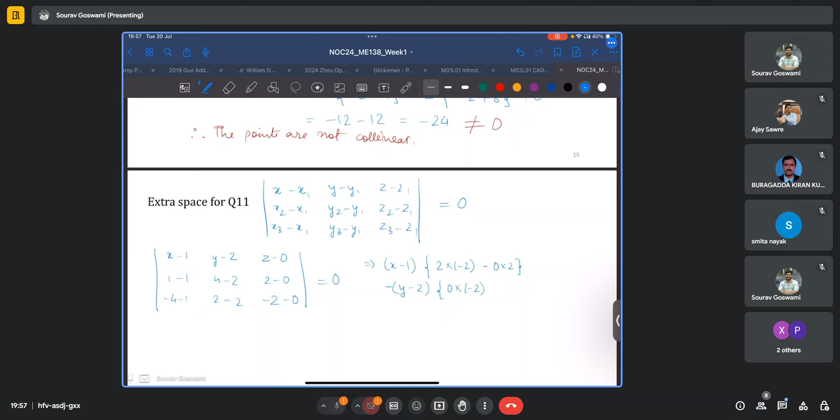Again, expanding along the first row, you are free to expand along any other. x minus 1 times 4 minus 2 is 2 into minus 2 minus 0 into 2, minus y minus 2 times 0 into minus 2 minus 5 into 2, plus z minus 0, so z times 0 into 0 minus minus 5 into 2, equals 0, or x minus 1 times minus 4 minus 0 is minus 4, minus y minus 2 times

10, plus z times 10 is equal to 0, or minus 4x plus 4 minus 10y plus 20 plus 10z is 0, or 4x plus 10y minus 10z minus 24 is equal to 0. This is the required equation of the plane which contains all 3 points.

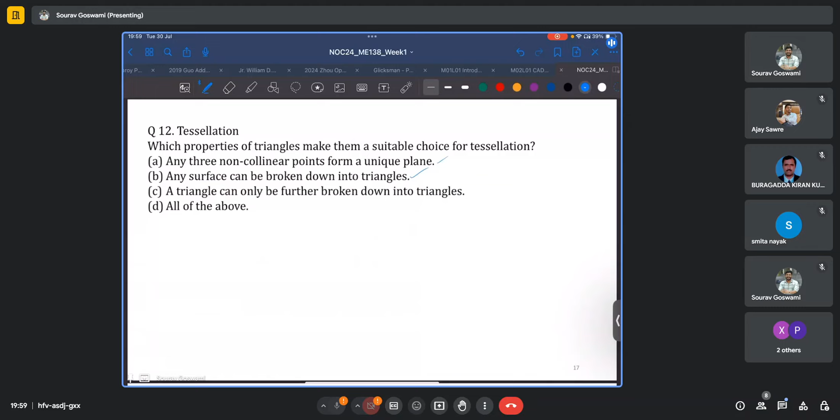We have a question on tessellation. Which properties of triangles make them a suitable choice for tessellation? So this was covered in great detail by Professor Kapil. Any three non-collinear points form a unique plane. Yes, any surface can be broken down into triangles. True. Triangles can only be further broken down into other triangles. So all of the above options are true.

And I did some research into tessellation, and the question which might also have arisen in your mind is whether it is possible to tessellate a surface with any shape. And turns out it is not. With triangles, that are polygons with three sides, all triangles tessellate, and with quadrilaterals or polygons with four sides, the sum of angles contained within them is 360, and all quadrilaterals tessellate, meaning that they can cover a surface so that there are no gaps between them. Of course, they might not be the most efficient means, and they might not be able to cover all surfaces with high curvatures.

For pentagons or five-sided polygons, there is a list of 15 types of convex pentagons which tessellate, but it is not rigorously known if this list is complete or there are other types of pentagons which may tessellate. Hexagons or six-sided polygons do tessellate sometimes, and there is a list of three types of convex hexagons which tessellate, and in this case it is known that only these three types may tessellate and there are no more. For polygons with 7 or more sides, there are no convex polygons which tessellate. So, a piece of interesting trivia.

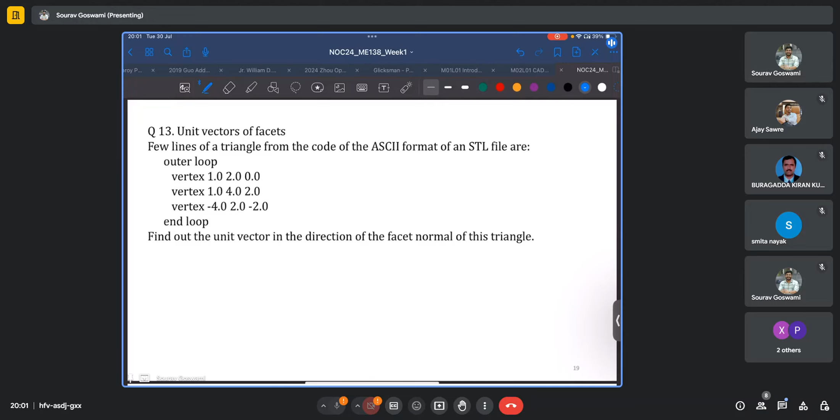We are almost out of time, but we'll cover at least one more question. So, the next question is dealing with the unit vectors of the triangular facets. A few lines of a triangle from the code of an ASCII format of STL file are given. We have to find out the unit vector in the direction of the facet normal of this triangle. So let us just draw a schematic triangle here.

Say this is our triangle, and let's name the points A, B, and C, of course, going in a counterclockwise fashion. And let the vertex A have the coordinates 1, 2, and 0. Let B have 1, 4, and 2.

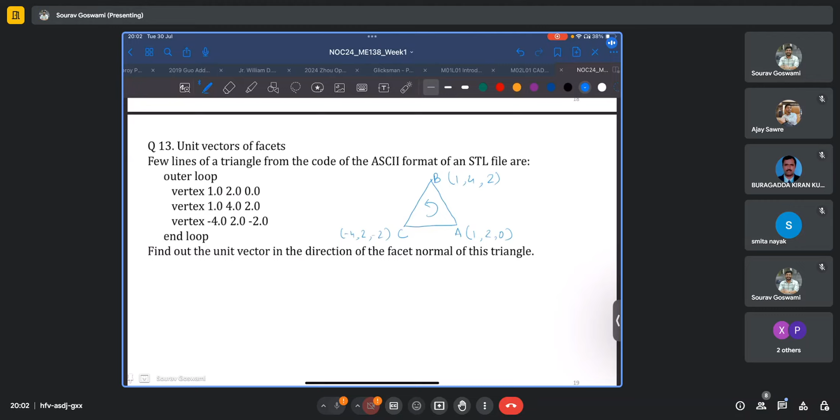And let C have the coordinates -4, 2, and -2. Now, utilizing the information of these vertices, we are asked to find the unit vector in the direction of the facet normal of this triangle. And as I had mentioned while we were recapitulating the lecture contents, we can use the vector cross product to actually find this unit normal.

So first, let us find the cross product of any two vectors. So here we can construct three vectors being AB, BC, or CA. So if I write the vector AB, it will be the difference of the position vectors of B and position vector A. So basically difference of the components, which will be 0 i hat plus 2 j hat plus 2 k hat.

Similarly, if I write the vector BC, it will be -4, 2, -2 minus 1, 4, 2, which is equal to -5 i hat minus 2 j hat minus 4 k hat. Now let us compute the vector cross product of these two vectors AB and BC. So AB cross BC,

and just a quick recollection of the steps to find the vector cross product. So we calculate the determinant of i, j, k and the components of the two vectors: 0, 2, 2, -5, -2, -4. And if we expand along the first row, i hat times minus 8, 2 into minus 4, minus 2 into 2, so plus 4, minus j hat times 0 into minus 4, minus 5 into 2, so plus 10, plus k hat times 0 into minus 2, minus minus 5 into 2, so plus 10 again. This gives us minus 4 i hat minus 10 j hat plus 10 k hat.

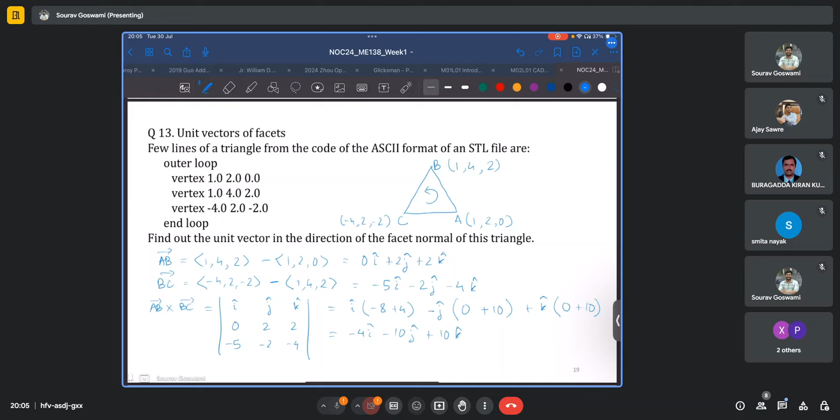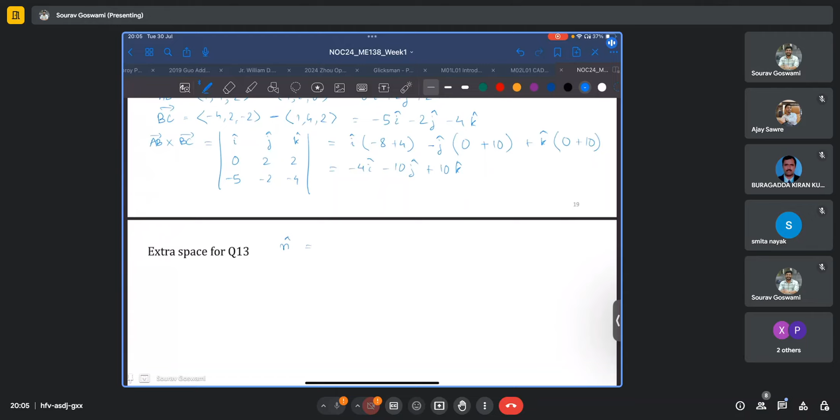This vector cross product is a normal vector to both AB and BC, but it is not the unit normal vector. To find the unit normal vector, we have to divide the vector cross product AB cross BC by its norm or magnitude. So the norm in this case is equal to the square root of minus 4 squared plus minus 10 squared plus 10 squared, which is 16 plus 100 plus 100, that is 216.

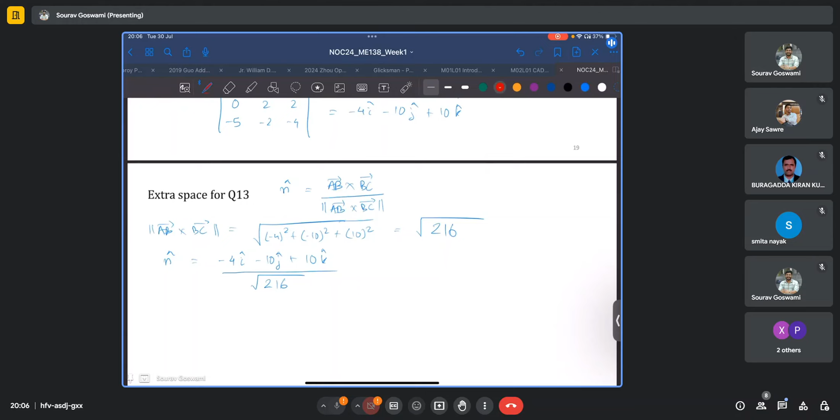Thus, our unit normal vector is nothing but the cross product, minus 4 i hat minus 10 j hat plus 10 k hat, divided by the norm, which is the square root of 216. It might be possible to simplify this further, but for all practical purposes, this is the unit normal vector along the facet normal of this triangle.

Perhaps the last question for today. Which file format are we concerned with in AM? So what pieces of information are not contained in an STL file? We looked at how the STL file only contains information about the geometry or the geometrical representation. It does not contain any information about the topology, as was already listed out. And we also looked at the makeup of the STL files in both the ASCII format and the binary format.

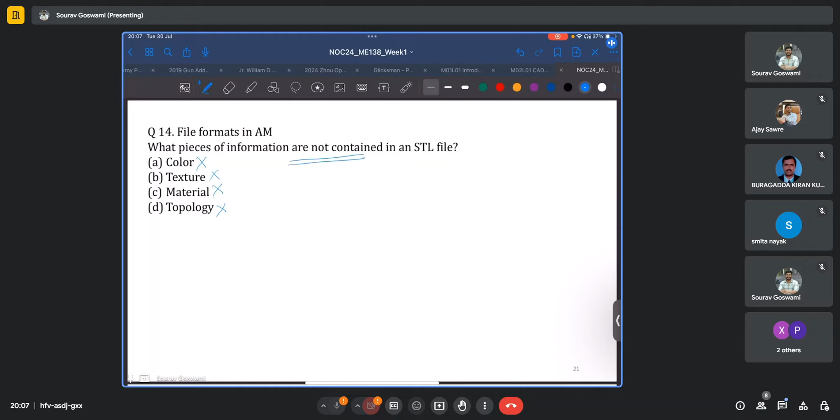And there we saw that there was no information regarding the color or the texture or even any scope for storing information about the material. So none of this information is contained. The question asks us which pieces of information are not contained. So all of the options are correct.

While STL continues to be the most popular and perhaps the most widely adopted file format for additive manufacturing applications, there are new formats that have come up which seek to fill in some of these gaps or address some of these drawbacks of the STL file format. Two such formats are given here. One is OBJ, which encodes the surface geometry of a 3D model. It can also store the color and the texture information, either in the form of a companion PNG file containing a texture map or a material template library containing face attributes.

A second format is the AMF format, which is in fact the additive manufacturing format, an XML based format for communicating AM model data, including a description of the 3D surface geometry with native support for color, materials, lattices, textures, and constellations. Similar to STL, the surface geometry is represented by a triangular mesh, but in the case of the AMF file format, the triangles can also be curved. So you can have a very accurate representation of the curved surfaces utilizing this file format.

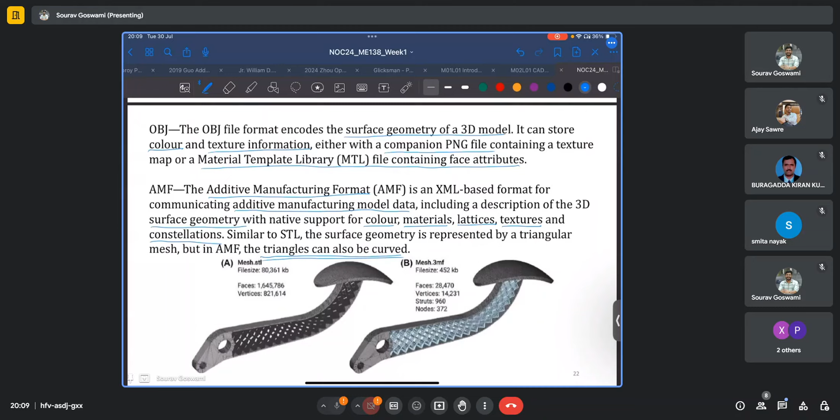We also had a couple of questions on the deviation tolerance and the angle tolerance, but we'll be taking them up in the next session. So I will stop here for now. I'm sorry we have run out of time. So in case you have any questions, you can pose them in the next session, which will be happening next Tuesday.